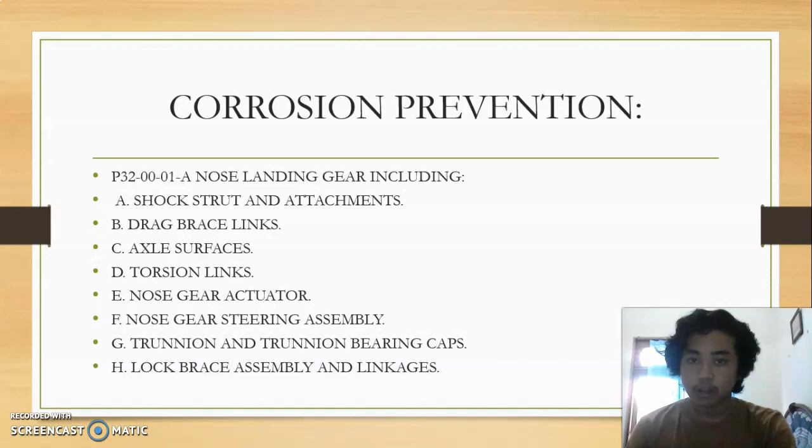Include nose landing gear. First, clean the nose landing gear and components, inspect for damage, paint finish damage, plating, and check for corrosion. Second, if corrosion is evident, remove corrosion and restore protective finish as practical.

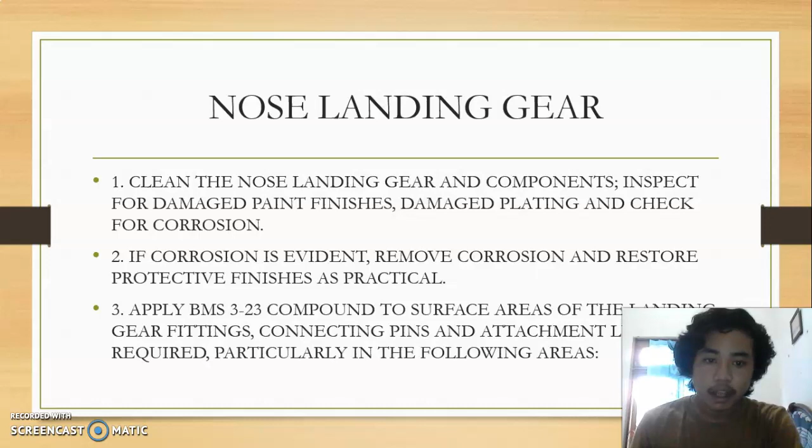Third, apply BMS 3-23 compound to surface areas of the landing gear fittings, connecting pins, and attachment lugs as required, particularly in the following areas: A. Shock strut, including equipment attached to the outer or inner cylinder, steering cable, pulley, brackets, and inside of tapped holes.

B. Upper and lower drag brace links. C. Axle surface except bearing and journal areas. D. Upper and lower torsion links and towing lugs. E. Nose gear actuator. F. Nose gear steering assembly. G. Trunnion and trunnion gearing caps. H. Lock brace assembly and linkages.

Note: in cases where periodic cleaning is accomplished with steam or high water pressure and detergent, apply BMS 3-23 to the nose gear components. Caution: do not apply BMS 3-23 to silicone rubber seals or control cables. Observe other precautions shown in part 1.

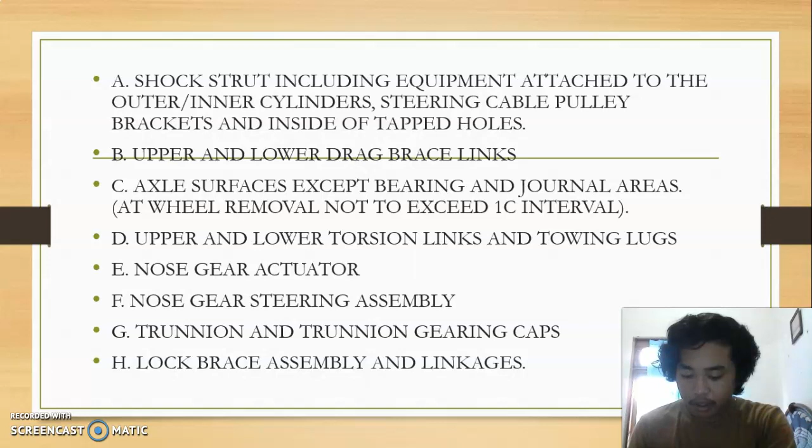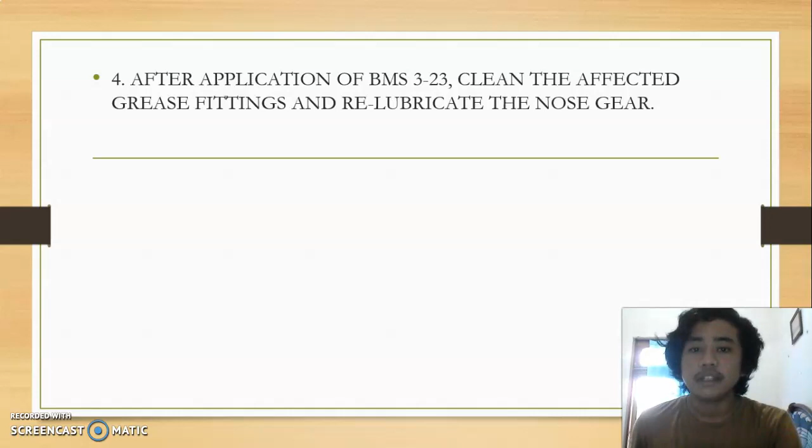4. After application of BMS 3-23, clean the affected grease fittings and re-lubricate the nose gear.

Next, left main landing gear, including the first: clean the main landing gear and components, inspect for damage, paint finish damage, plating, and check for corrosion. 2. If corrosion is evident, remove corrosion and restore protective finish as practical.

3rd, apply BMS 3-23 compound to surface areas of the landing gear fittings, connecting pins, and attachment lugs as required, particularly in the following areas. A. Shock strut and strut door attachment.

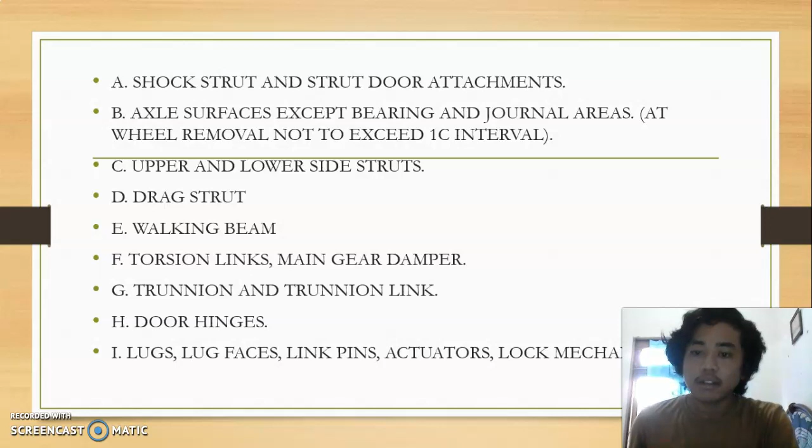B. Axle surface except bearing and journal areas. C. Upper and lower side struts. D. Drag strut. E. Walking beam. F. Torsion links, main gear damper. G. Trunnion and trunnion link. H. Door hinges. Lug face, link pins, actuator lock mechanisms.

4. After application of BMS 3-23, clean the affected grease fittings and re-lubricate the landing gear.

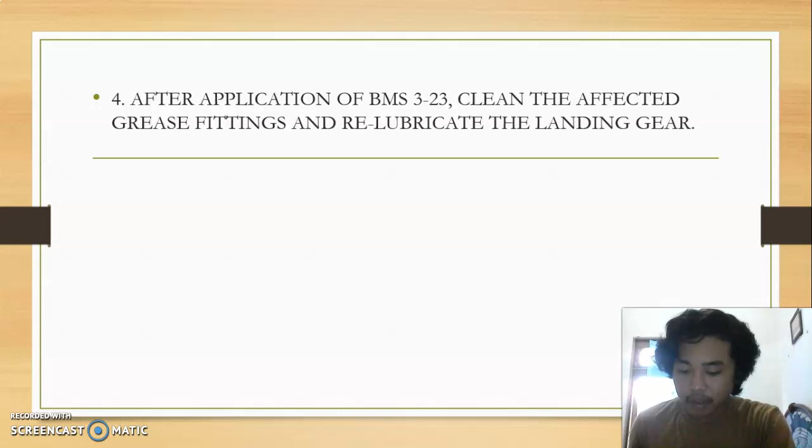Note: in cases where periodic cleaning is accomplished with steam or high water pressure and detergent, apply BMS 3-23 to the main landing gear. Caution: do not apply BMS 3-23 to silicone rubber seals or control cables. Observe other precautions shown in part 1, section 1600, page 3 and 4 of the corrosion prevention manual.

Next, right main landing gear, including the first: clean the main landing gear and components, inspect for damage, paint finish damage, plating, and check for corrosion. Second, if corrosion is evident, remove corrosion and restore protective finish as practical. Third, apply BMS 3-23 compound to surface areas of the landing gear fittings, connecting pins, and attachment lugs as required, particularly in the following areas.

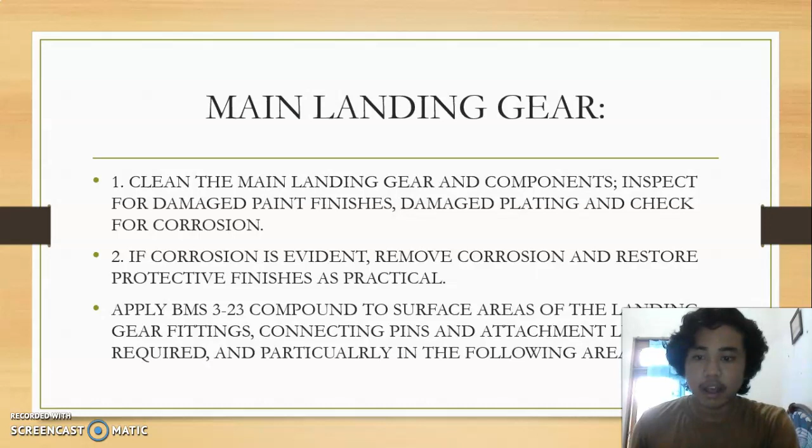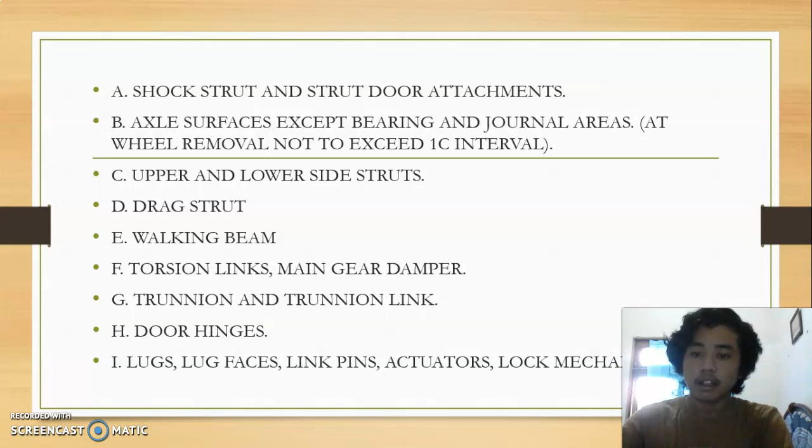A. Shock strut and strut door attachment. B. Axle surface except bearing and journal areas. C. Upper and lower side struts. D. Drag strut. E. Walking beam. F. Torsion links, main gear damper. G. Trunnion and trunnion link. H. Door hinges. Lug face, link pins, actuator lock mechanisms.

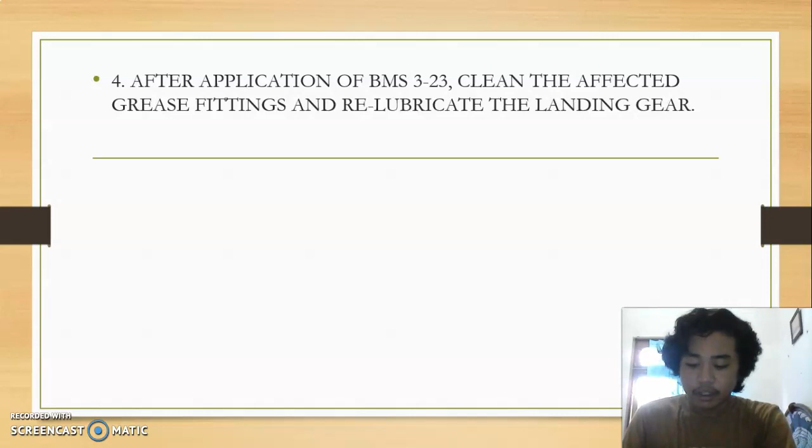4. After application of BMS 3-23, clean the affected grease fittings and re-lubricate the landing gear. Okay, that's all I can present. If there are shortcomings, please forgive me. Thank you.